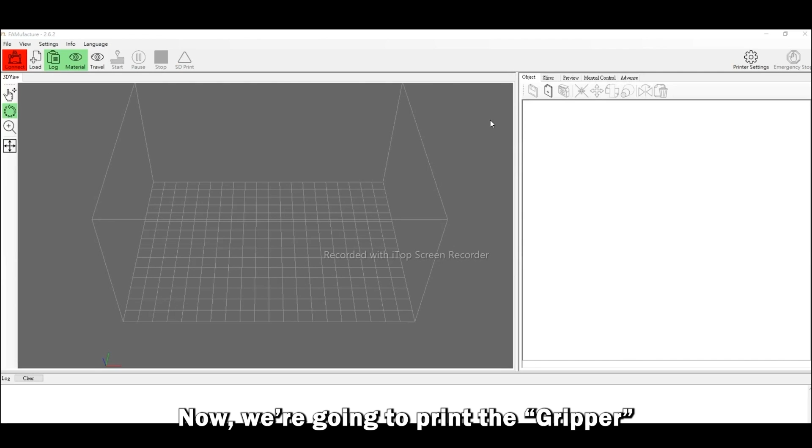Now we're going to print the gripper. Click Printer Settings on the top right of the software and set nozzle diameter to 0.25mm under the Extruder tab. If 0.25mm is already displayed, no setting is required. Then press OK.

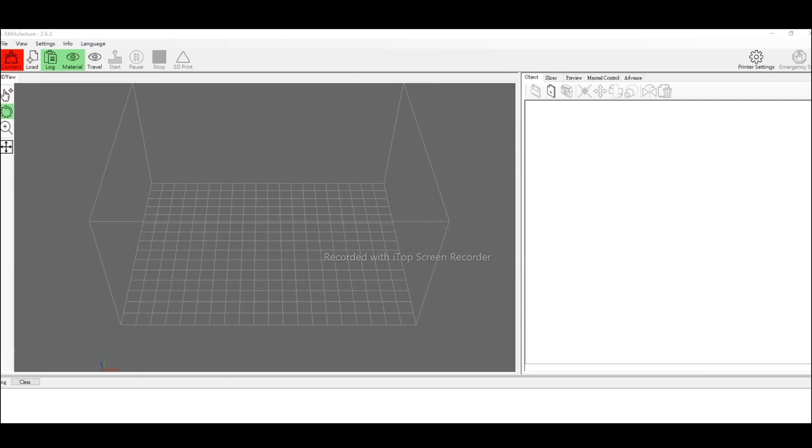After setting the nozzle diameter, click Configuration on the right of the software under the Slicer tab. Next, click Import to import the parameter file named gripper 0.25NZ, which is the most suitable print setting for the gripper.

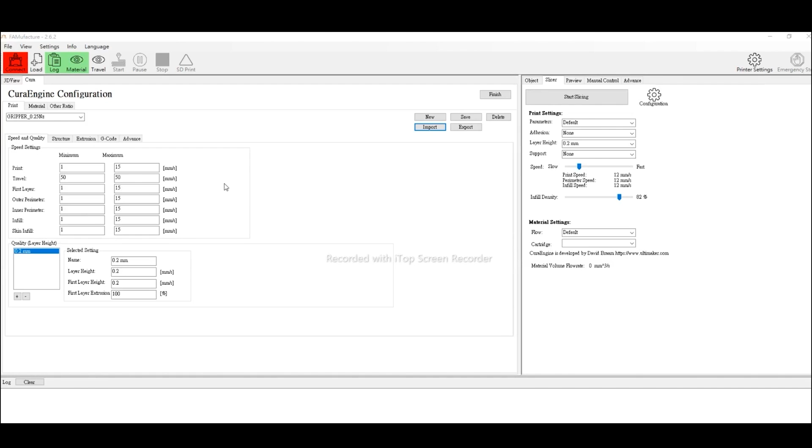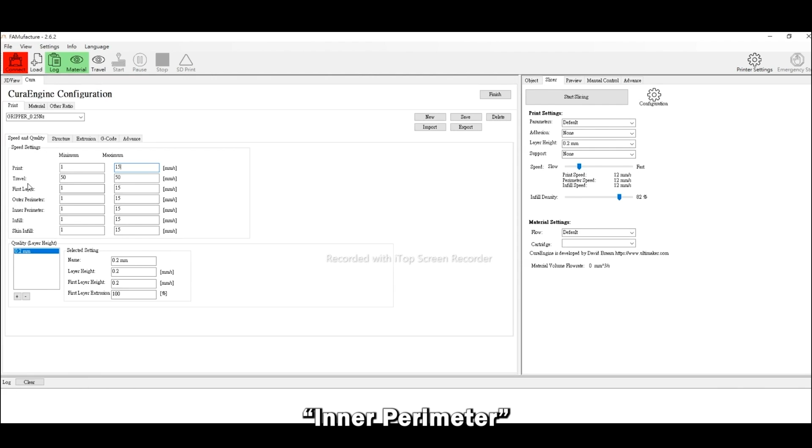Now let's talk about the parameter values adjusted for the gripper, speed and quality. Because the material is 2-part LSR silicone, the recommended printing speed is 1 to 15 mm per second. This value is suitable for first layer, outer perimeter, inner perimeter, infill, and skin infill.

Travel speed is the speed the print head moves when it's not extruding, to shorten printing time and reduce stringing. Travel speed is suggested to be set to 50. Quality is suggested to be set to the default value, which is 0.2.

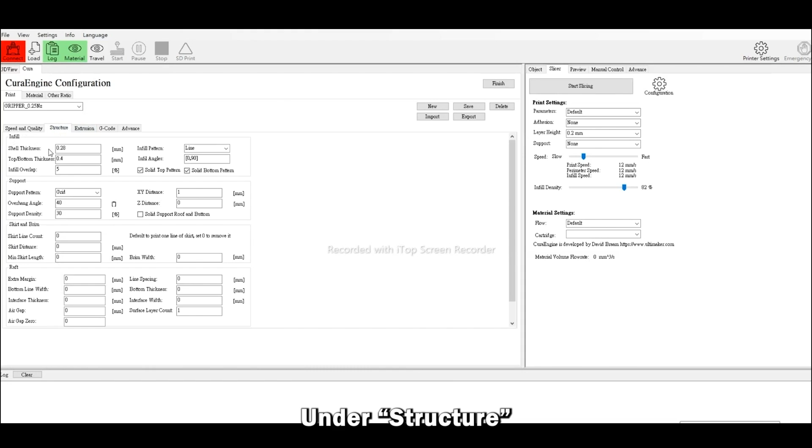Under structure, shell thickness is set to 0.28mm, which is the most suitable value for testing. To avoid holes in the appearance of the gripper, top-bottom thickness is set to 0.4mm. Infill overlap is mainly to avoid gaps between lines when printing the first layer, so it's set to 5%.

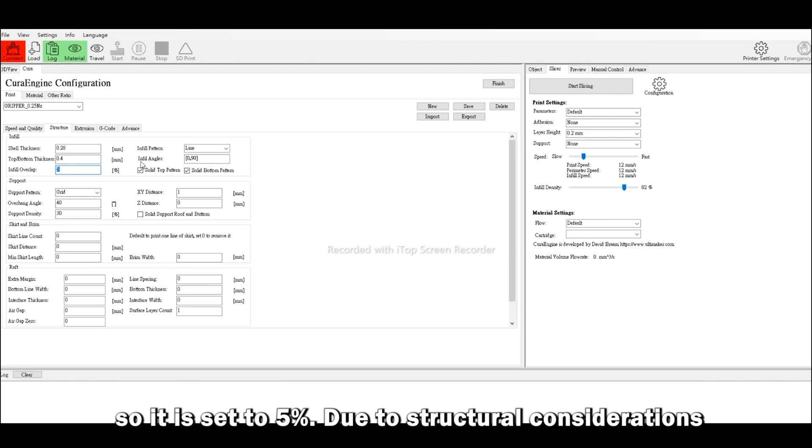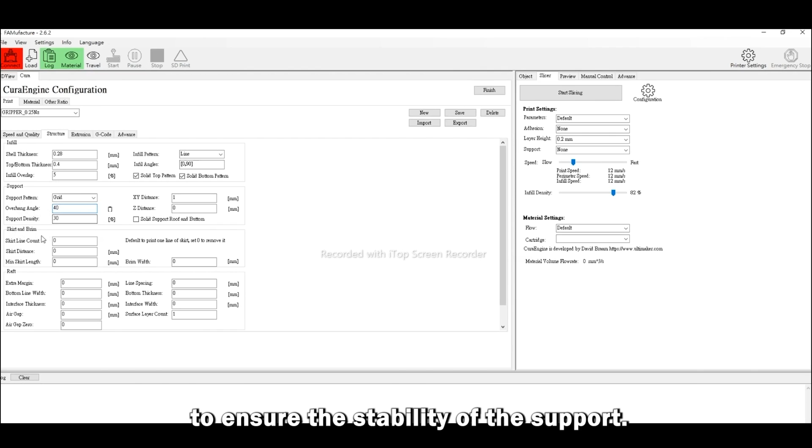Due to structural considerations, we choose line as the infill pattern. In the support section, to easily remove the support, grid is selected as the support pattern. Support density is set to 30%, and overhang angle is set to 40 degrees to ensure the stability of the support.

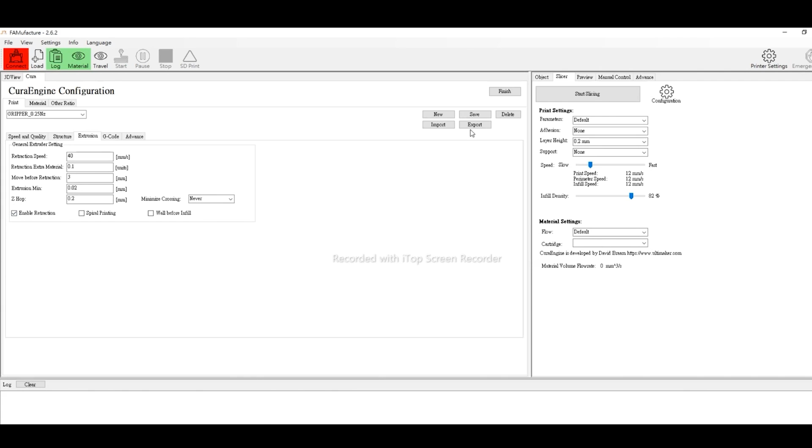Due to material properties, skirt, brim, and raft are not required, so those values are all set to 0. In the extrusion section, set the Z-hop to 0.2mm and enable Retraction below to enable the retraction function. After changing values, press Save, otherwise they cannot be applied to the slicing software.

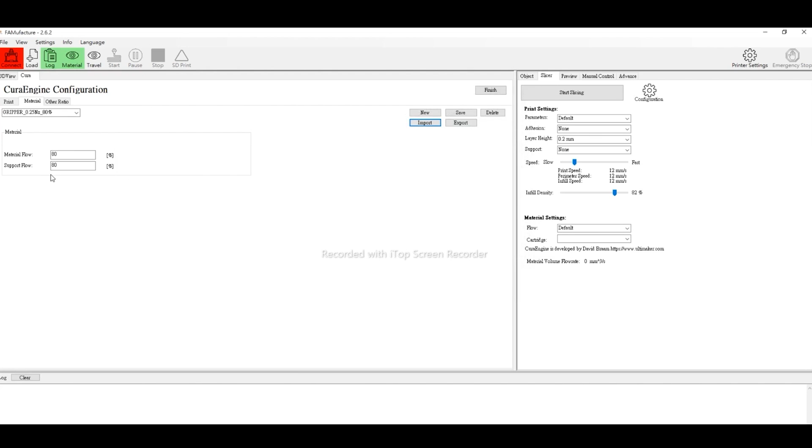Now we are going to adjust the material flow. Click Import on the material page and import the parameter file named gripper 0.25NZ 80%. The values for material flow and support flow are both set to 80%. This is the proper material flow for printing.

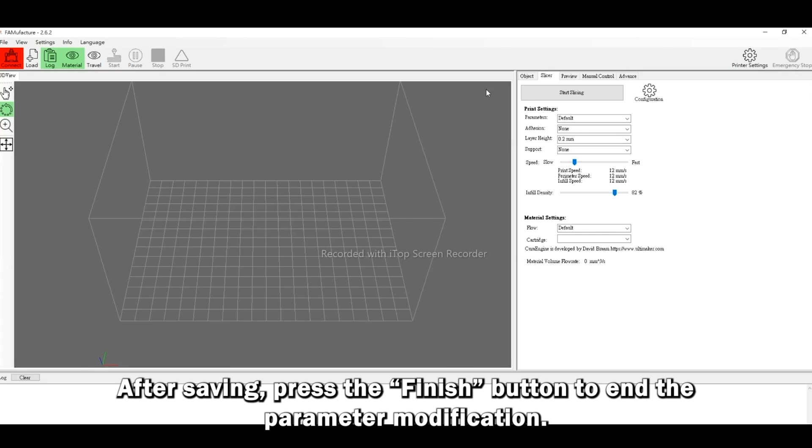After changing the value, you also need to press Save, otherwise it cannot be applied to the slicing software. After saving, press Finish to end the parameter modification. Then go back to Slicer on the right of the software.

In Print Settings, select the Gripper 0.25NZ parameter file for parameters. Adhesion and layer height use default values, which are none and 0.2mm respectively.

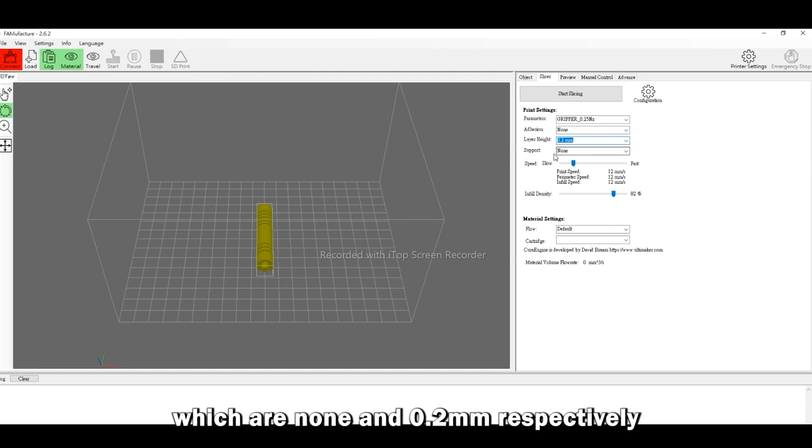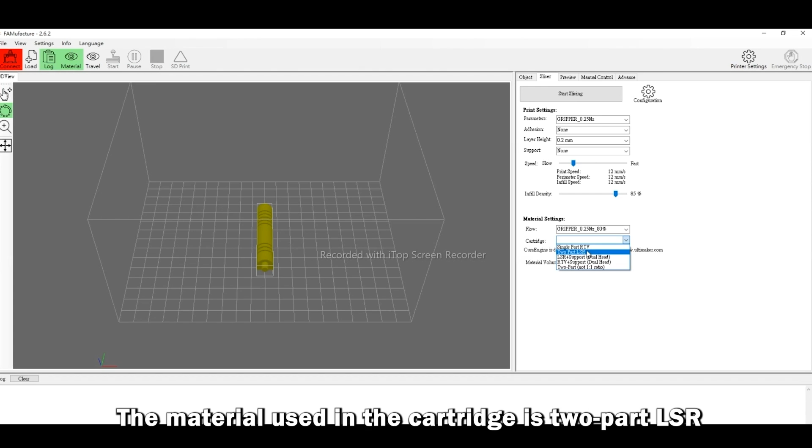Support is set to none. Speed is 12mm per second, and infill density is 85%. For flow, select the parameter file gripper 0.25NZ 80%. The material used in the cartridge is 2-part LSR, so choose 2-part LSR.

After the setting is completed and confirming the model has been imported in the object page, you can click Start Slicing to slice the model.

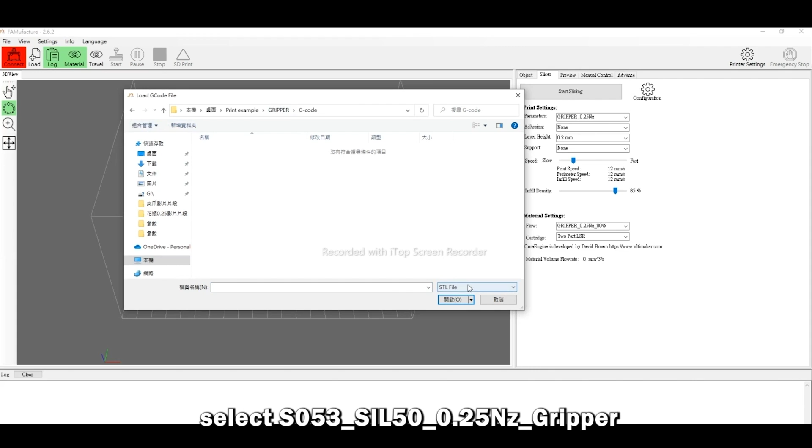The model G-code is also provided in a folder. Click Load above the software, select S053 SIL50 0.25NZ gripper to import the G-code file from the folder.

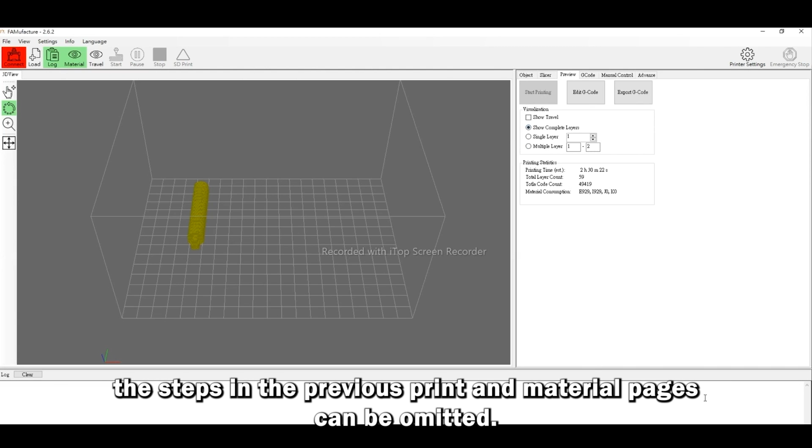After importing the G-code file into the software, click Start Printing in the Preview page so you can directly print the model. In addition, after importing G-code, the steps in the previous print and material pages can be omitted.